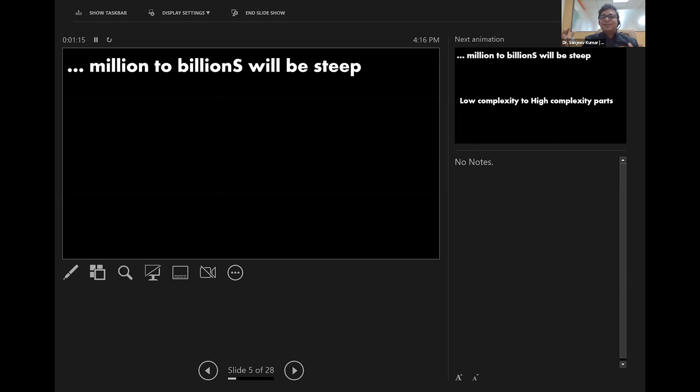And if I simplify it further, we are talking about how the low complexity parts we used to make, now we have to go and make high complexity parts. In essence, that is the transition we have to make.

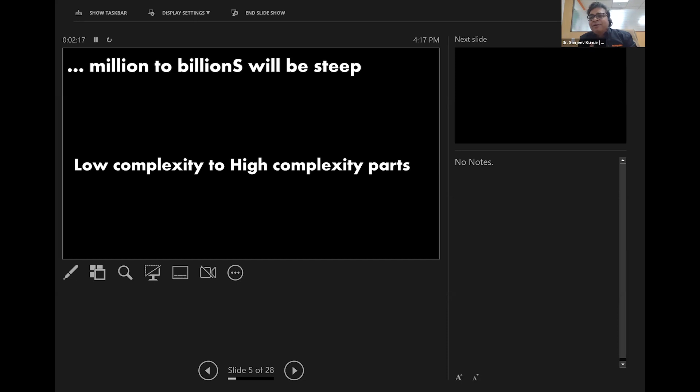If you look at the automobile sector and other sectors, we have a lot of complex parts there as well, but not of the nature required in the aerospace and defense segment. So essentially, we have to transition from low complexity to high complexity, and it's not an easy one. This is not easy, because for this you have to change the processes, you have to change the systems, and above all, you have to change the mindset. Mindset plays a very important role. The systems, the tools, and the technology will all be available, but if the mindset is not there to utilize those systems, we will not be able to leverage them. So that is very important. We have to change our mindset as well.

So I think opportunity is there, but this is for everyone. Each one of us has to think about what we need to change to capitalize on this opportunity. It's necessary to think about this. Otherwise, we will miss the boat, somebody else will come onto the boat and ride the wave and make money. How can we make money in India? How can we capitalize? And it is possible.

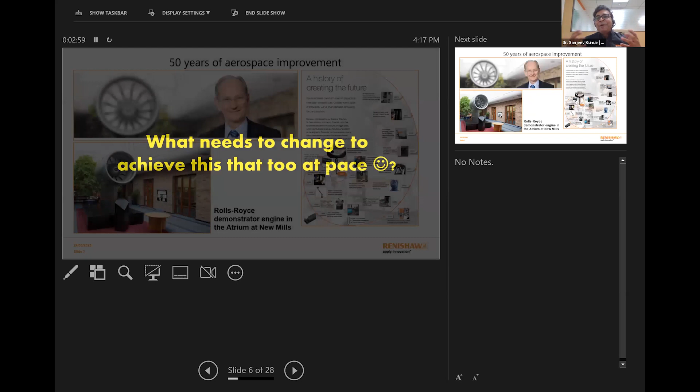So I'm going to talk about a few things that can help in that transition. Just a bit about Renishaw: basically, we are born out of aerospace. One of the founders, Sir David McMurtry, who you're seeing on the screen, along with John Deer, founded this company 50 years ago. This is our 50th year, and we are celebrating this. They were working for Rolls-Royce.

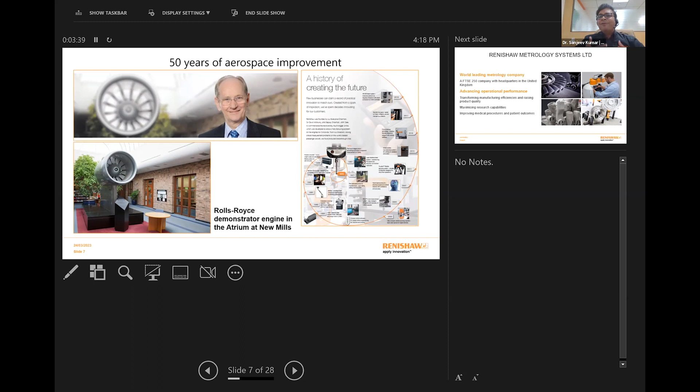They were working on a very famous engine - a lot of you may be too young to know, but you may have heard about the Concorde engine. With the Concorde and the Olympus engine, there was a particular challenge with the inspection of the fuel pipe, and that's where Renishaw was born. We are, out and out, a company that has helped a lot of aerospace and defense companies in the world.

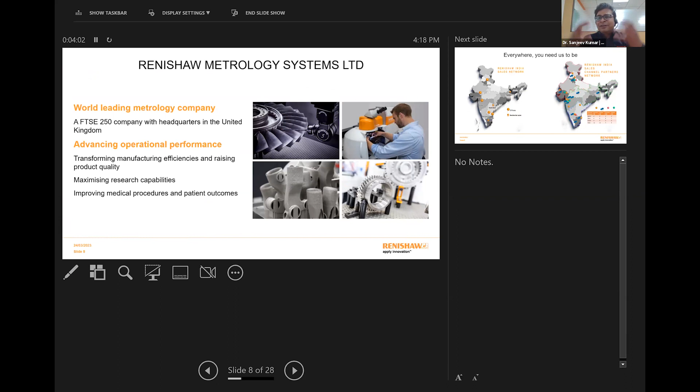So in simple words, we provide technology to speed up the production process. We provide technology to make sure you are able to measure your complex part, and ultimately you can make things faster, cheaper, and with less of a skilled force as well. We'll talk about some of these things too.

And in India, we have a large presence. We're everywhere, wherever you want us to be - we're in Pune, Bangalore, Chennai, Baroda, Gurgaon, Kolkata, we're everywhere. We have offices at 5 places, and we have a distribution network. And most importantly, our engineers are everywhere. Engineers, not the sales guys, not the business guys, but the core application engineers who are everywhere to help.

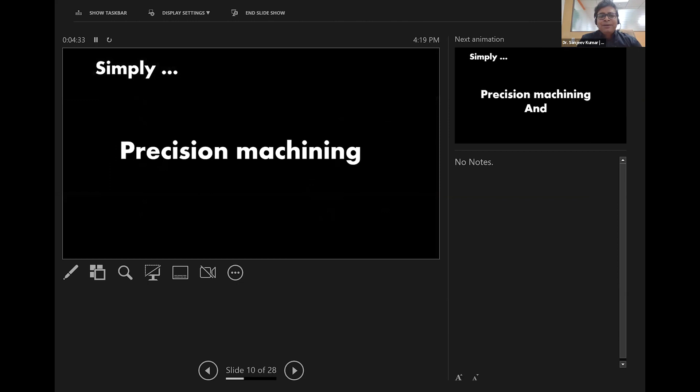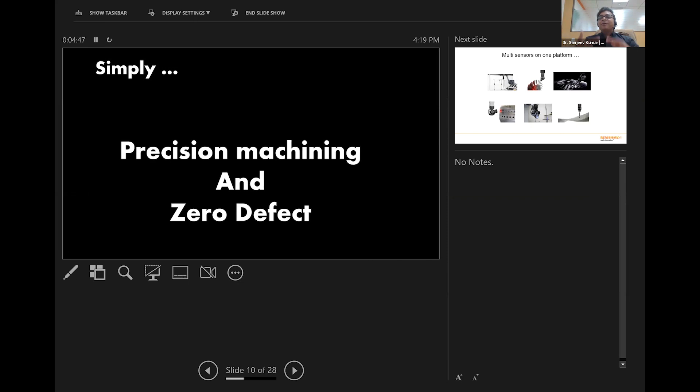So in simple terms, precision machining and zero defect. And if you recall, our honorable Prime Minister last year talked about zero defect. Unless and until we are able to produce zero defect, we will not be able to capitalize on the opportunities available in the aerospace segment.

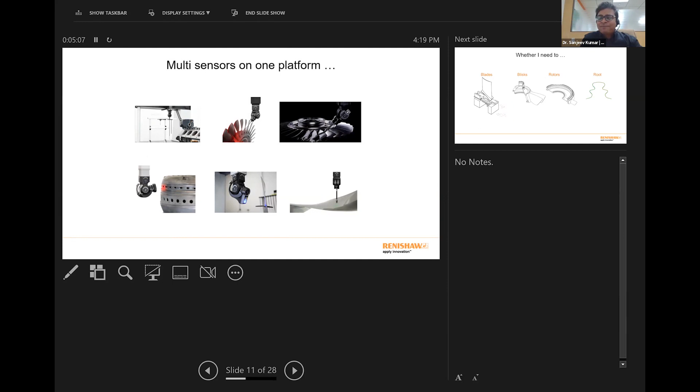To be honest, some of the technologies we provide can inspect a number of things like dimensional accuracy, surface finish, thickness, and various other parameters on one platform, whether these are blades, blisks, rotors, roots, fuselage, wings, brakes, frames, or landing gear parts, we can do all that.

For example, the cutting edge technology available now means what used to take 2 hours can now be done in 20 minutes.

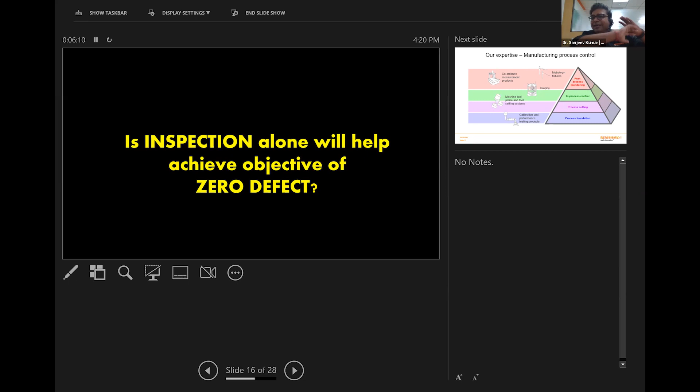So the most important thing is, how do we manufacture, how do we get our processes together that produce the right part all the time - first part, second part, hundredth part, thousandth part, all parts right.

So this is how we help right from the beginning of manufacturing, even before you've started machining. You have to ensure that the machines you use, the environment you use, the tools you use, the fixtures you use, are all in such a condition that will not produce variation while machining.

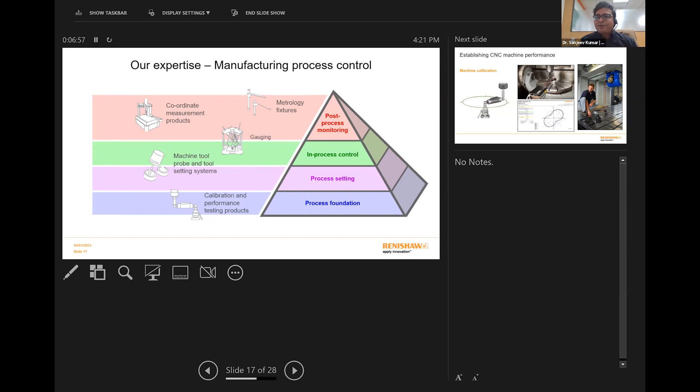So Renishaw has managed to get quality control as part of the manufacturing process, so you can control quality not only at inspection but right from the beginning, even before machining starts. There are a number of technologies we provide that work in terms of maintenance of these machines and making sure those machines are the right ones to produce parts.

Because if the input itself is not correct, how will the output be correct, right? So the machines play a very important role in ensuring they're in the right condition to make parts.

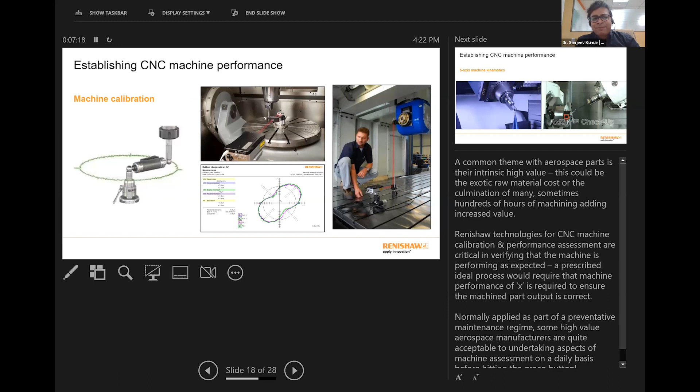Then, let's say when you've selected the right machine, the next thing is, before you start cutting the metal, do you have the processes set up accurately?

So that is where we have solutions to ensure that the way you set the part, set the tool, set the fixture, set the programming, they are all in the right condition as they should be. And if this is done rightly, a lot of your errors get reduced.

And this can be automated, so you don't have to rely on a lot of skills there. You can utilize the skill at the places where you actually need it.

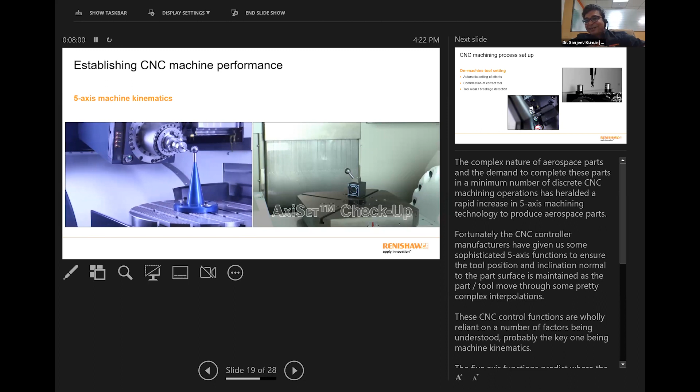Now, when machining has started, to ensure we are cutting the right component, making the right feature, there have to be control mechanisms that constantly ensure that if you've made a certain deviation, you can control and automatically adjust.

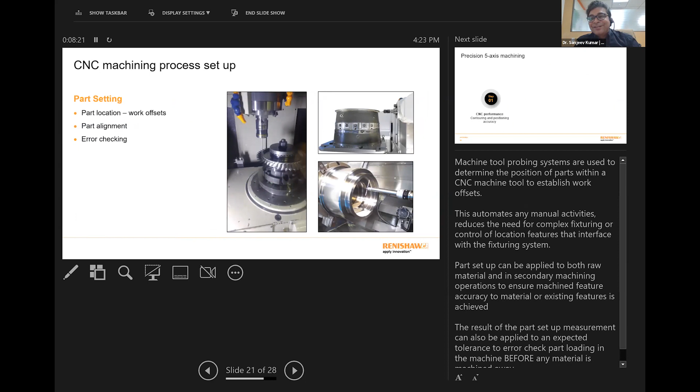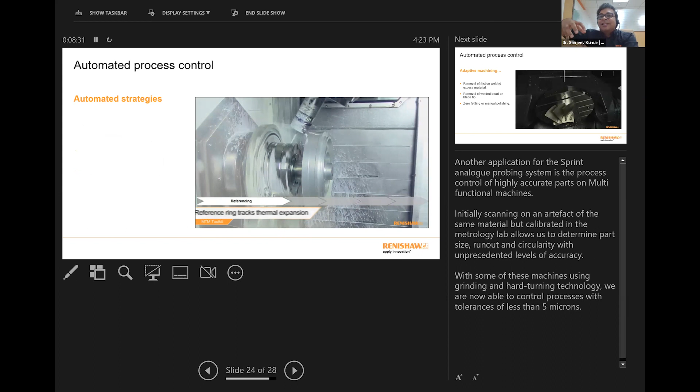So therein lies a lot of solutions that help you do this. And then, after you've made the part, how do you ensure that whenever you make a part, you check it as fast as possible, you check the process as fast as possible so you can make the right part.

So in essence, inspection is not the solution. The solution is thinking about your process, your manufacturing, in such a way that you have control points at each stage where you can control it.

And as an output, you get the right part, the quality part, whether it's the first or the last, you're able to make it, and you're able to make it fast enough, with fewer resources. And that's what we would like to help, support, and partner with industries here.

And as a proud Indian, I'm really proud that we are able to make this possible here. And as Raman sir said in the beginning, this is the time, this is the opportunity. Let's ride the opportunity. Thank you very much.